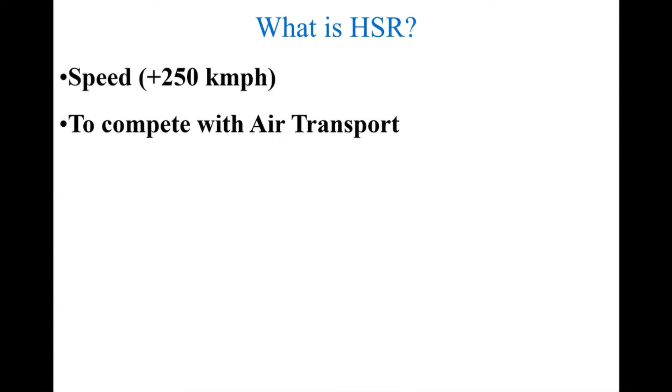The result of this construction for the high-speed track, we will only know once it is constructed and trains start plying on it; only then will we see the fruits. But as of today, the work on the Ahmedabad Mumbai section has already started. What I got from the concerned person is that contracts for almost 50% of the work have already been awarded. The rest are in the pipeline, and work is in different phases of construction.

Let us see some features of the Ahmedabad Mumbai speed corridor. Total length is 534 kilometers. This is a combination of elevated, on-formation, and tunnel sections. Elevated means construction of viaducts. The design of the entire track is by the Japanese agency JICA. It will mostly be concrete roadbed and slab track, whether elevated or on formation. The target speed is 350 kmph, and the cost is about 1 lakh crore, which may vary slightly depending on the time.

Train frequency in peak hours is every 20 minutes, which is what they can accommodate in their system as the maximum capacity targeted. But in the beginning, probably this will not be the frequency. As stated by the MD of the High Speed Corridor, they are planning to run every 30 minutes in peak hours, and in non-peak hours it may run every 1 hour or maybe every 2 hours. That is the planning.

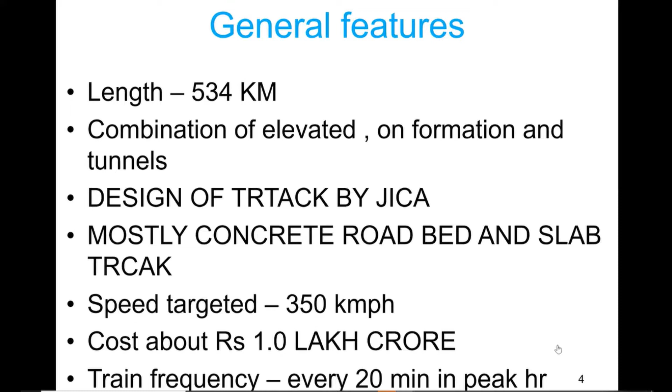Now, the requirements of high-speed rail in regard to track: it is track structure and geometry, then formation wherever we are constructing on formation, rolling stock, advanced electrification and signaling system, advanced operating system, and of course we need to introduce an advanced maintenance system also. So let us see one by one.

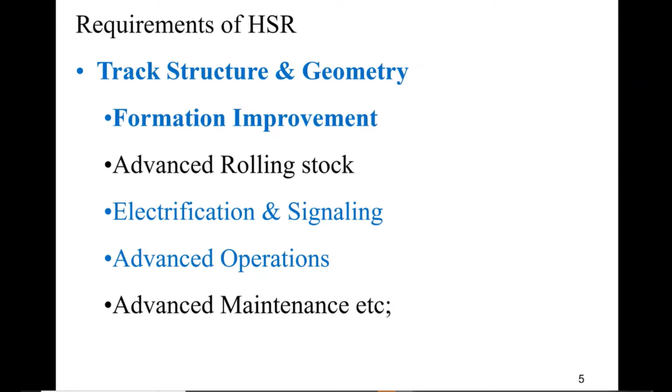Track structure and geometry: in the entire construction, the sharpest degree of curvature is only 0.5 degree. Sharpest means anywhere in the entire section it is 0.5 degree; otherwise it is mostly straight or less than 0.5.

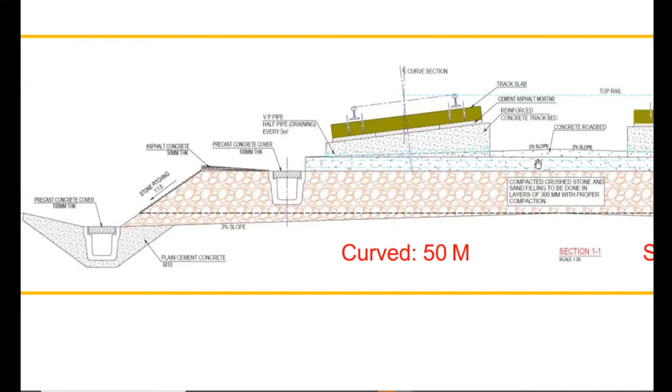This is the section of slab and track. Let me give you two minutes to see this item here, let me make it slightly bigger. See this first section, this is for curved track. This is a side drain here, followed by formation and another drain on this side. First it says the compacted bed here, and over the compacted bed you have a concrete roadbed. So one by one, if you see all components from bottom to top, the structure for the entire construction, you will be able to appreciate how sturdy and strong they are making it.

So first let us see, this is rail. Below rail you have track slab, this precast track slab, the green one. Below this track slab you have cement asphalt mortar to provide a cushion and also facilitate some corrections to cross levels. Below this cement asphalt mortar you have reinforced concrete bed. The requirement of super elevation for this high speed track is taken care of in this RCC road bed. Whatever super elevation was required as per the degree of curvature of your mainline curve, that super elevation is provided here in RCC road bed.

Now below this RCC road bed we have lean concrete bed. This layer, where my cursor is moving, this is your lean concrete bed. So RCC bed, then below is lean concrete bed. Here also some reinforcement is provided to take care of thermal expansions, and below this ordinary concrete bed you have compacted crushed stone and sand filling done in layers. That is the formation normally we provide in our railway track.

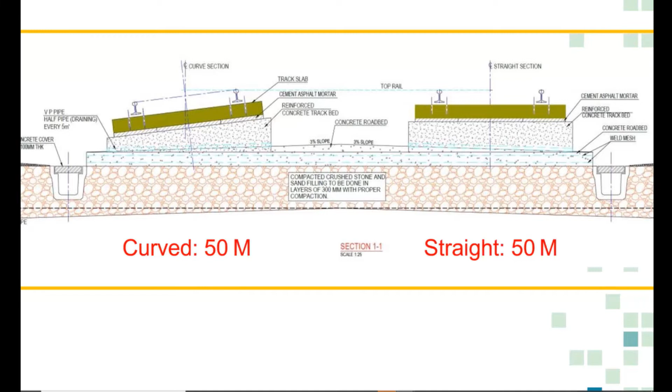For curved track, the super elevation is provided in the upper RCC concrete road bed. If it is straight plain track, no super elevation, the structure will look like on the right side. So this is the shape or structure for high speed track, whether curved or straight. This sample or model has already been created at Baroda near our Nair Institute, because the high speed office is located near Nair Institute. They have created this sample model track structure both for curve and for straight. If somebody happens to visit Nair, please see this track structure already available there.

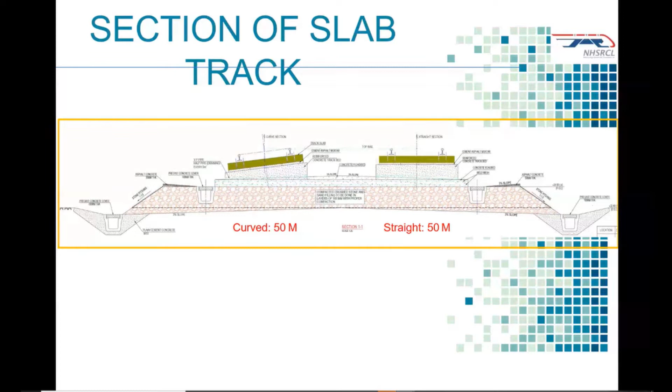So this is the general arrangement of different components of the track. Now this is a simple view of precast slab, where my cursor is running. You can see these are the precast slabs and rails fixed on the precast slab. All the construction on formation has been done, and here you can see this arrangement. This is the RCC concrete road bed, not the lower one. Over it you have cement asphalt mortar, and then precast concrete slab. Over it you have rail and fastenings.

This round shaped structure, which is called a bollard, is part of this RCC concrete road bed. This round shaped structure acts in two ways: one, to provide a clear separation gap between one precast slab and the other; secondly, it also resists the lateral or longitudinal disturbances of the precast bed slab.

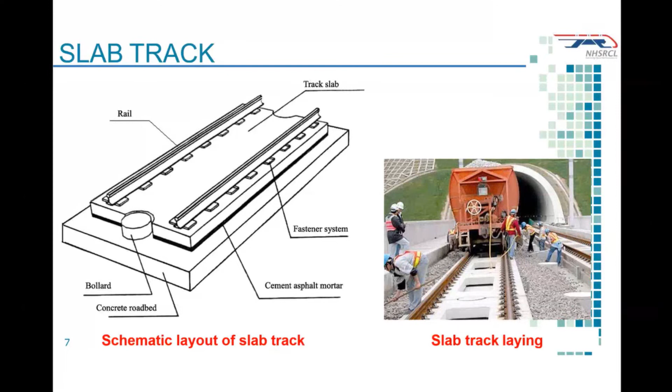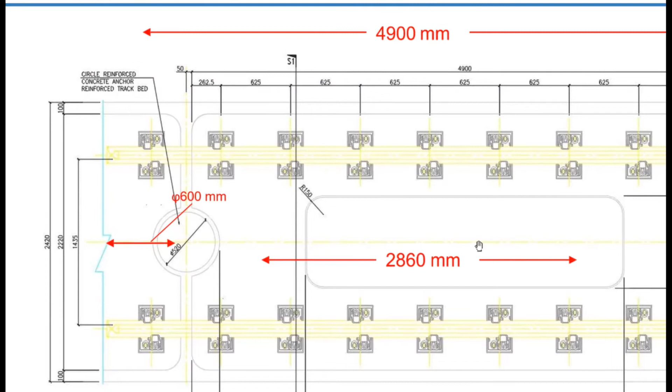So this is the top plan of your slab track, and now let us see the step-by-step construction of how they created a model track structure in Baroda. The same photos I have got from them. If you move from here, this is before site clearance, the first figure. Then the second figure shows site clearance in progress.

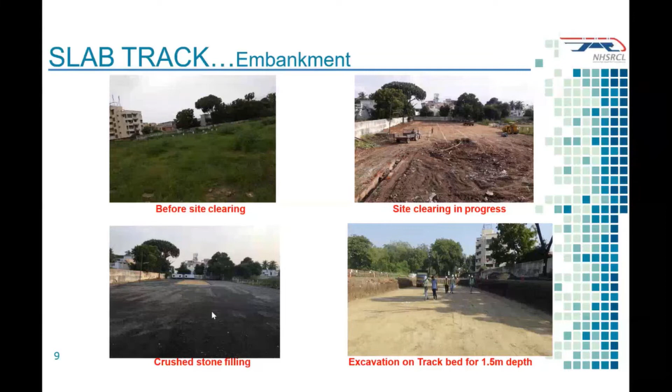Then crushed stone filling, that means creating a formation. So here in third, excavation is going on, and after excavation, preparation of formation. You can see this is backfilling, creating a formation. Now we have reached up to the top of formation.

As in our construction, we check by CBR value regarding the construction quality and its capability. We check by CBR value. In Japan, or by JICA, they check by the so-called K30 value. This K30 value is similar to our CBR value. So they ensure with this K30 value that the formation top is properly compacted and properly constructed.

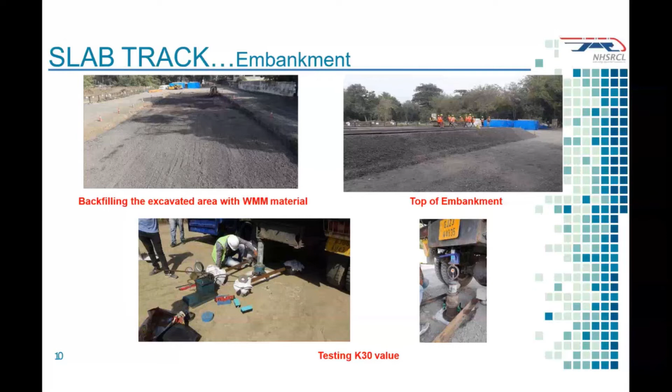So this is how the top of formation is created. Now after top of formation, this is the bottom wala concrete. You can see the reinforcement. This is called wire mesh placing on top of reinforcement, on top of embankment, and then the bottom wala concrete bed. Reinforcement is provided in this concrete bed, and this is not lean concrete. In fact, as compared to the top wala, this is proper concrete, 1:2:4 wala. So proper concrete road bed is in progress with reinforcement. This is that bottom wala concrete bed.

You can see the slope has been provided here on both sides in the bottom wala concrete bed, as we saw in the initial cross section, and this is final finishing. So finally the bottom wala concrete road bed is constructed, and this is without any cant, because cant has to be given on the top wala concrete bed.

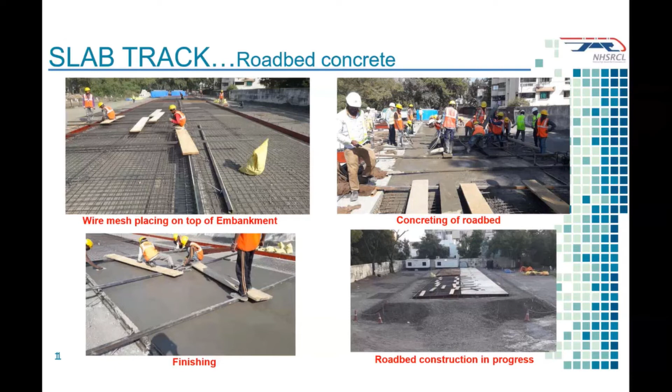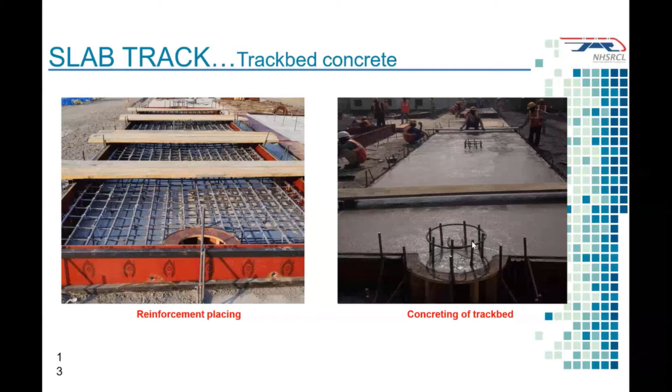So this is the top concrete bed. And finally you can see the bottom wala here. This is bottom wala, and over it you have this top wala. Now here, because they were creating a model type of track structure, on one side this is a plane without any super elevation, and on the other side they have created it with super elevation, whatever was required as per design. So this is finally the constructed road bed.

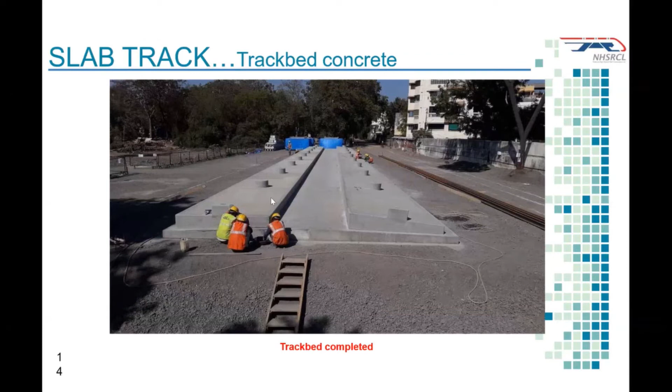Still, precast slabs have not come over it. So you have formation, then one layer of concrete bed, that is also RCC, of course lean RCC, and then you have the proper RCC road bed. Now over it will come your precast slab, and these are the precast slabs. These precast slabs will be constructed in a different place, in a controlled manner, where you have all facilities of controlling the quality, and then they will be transported to the site and placed on top of the top concrete bed.

Of course, in between there will be a layer of cement asphalt mortar. So this is the construction from bottom to top.

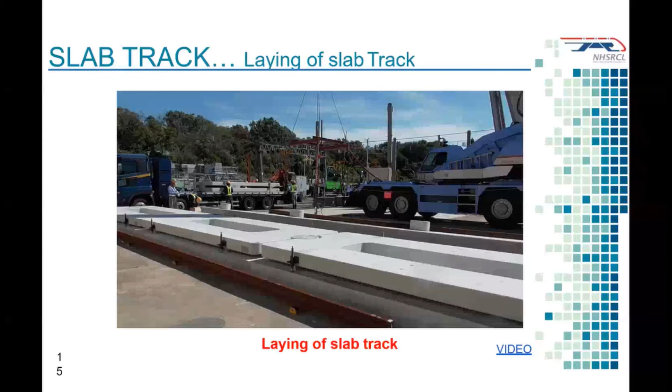Now here they are showing how the cement asphalt mortar is placed between the top precast slab and the top of the concrete bed. For this they have a machine which, with the help of hydraulic pressure, fills up the bags, and these bags are laid between the slab and the top of concrete bed. Whatever little corrections are required, those corrections and levels can be done with the help of this cement asphalt mortar.

So this is how it is done. And finally, when the slab is placed, you see this layer of CA mortar filled in proper bags. This provides cushion and also helps in slight modifications in level.

Why slight? Because there is a chance of too much deterioration if you rely on it too much, since you are taking all precautions. Whatever you construct should be perfect. So the construction quality has to be so good that right from the beginning you have all parameters in a perfect condition. So this is how they go about it.

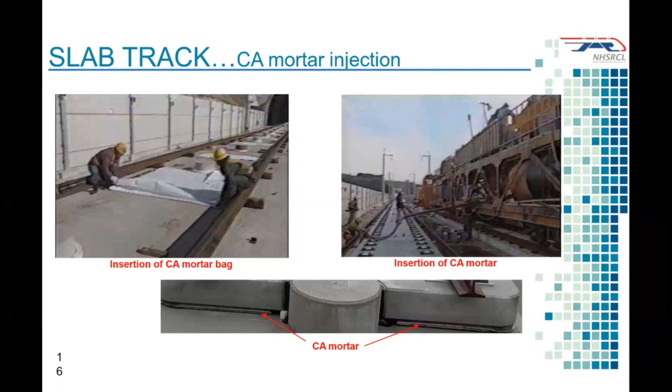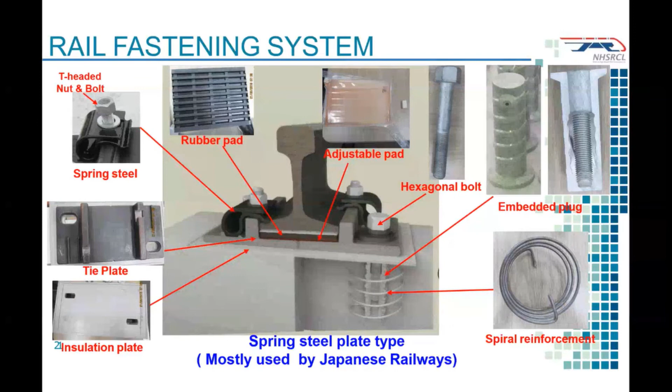And thereafter, it is brought for taking out. In the meantime, you check the strength of concrete also, whether it is meeting the requirement or not. So this is a 1 day cycle.

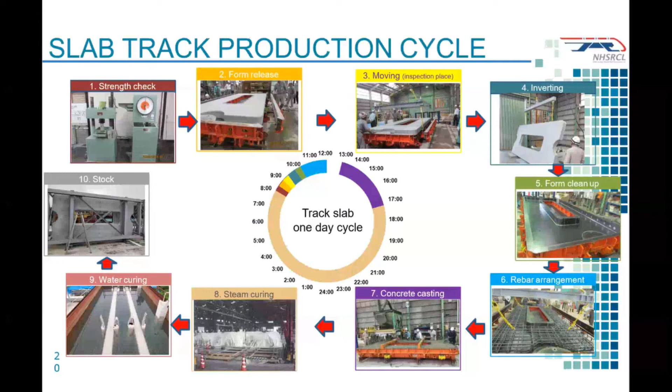Most of the activities are mechanized, like opening and closing of this formwork. This opens in a hydraulic manner - this is our formwork or mold, and this is how it opens. You can see opening and placing of reinforcement and inserts, etc., for fitting the rails.

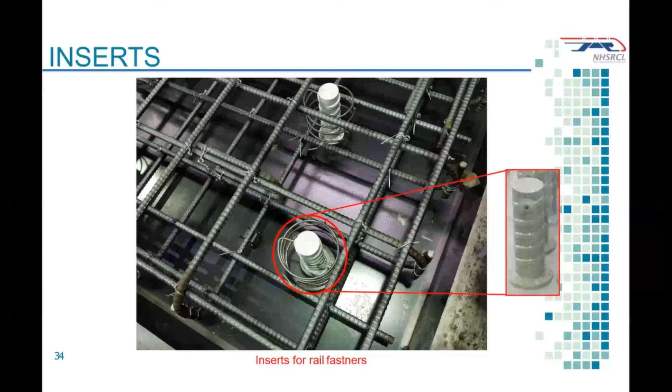That is the reinforcement cage ready to be lifted and put up. This reinforcement cage is prepared outside, not within that formwork. It is prepared to the exact dimension, then lifted and placed on top of the mold.

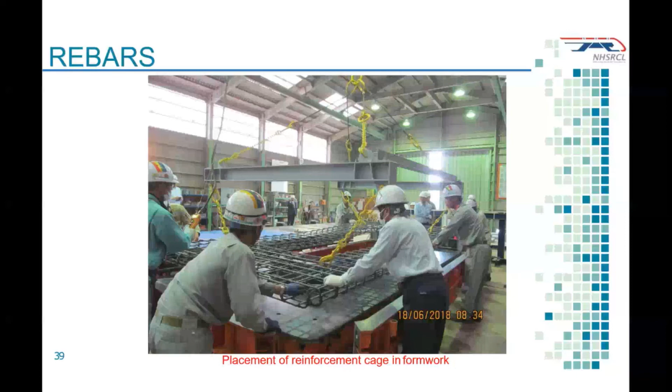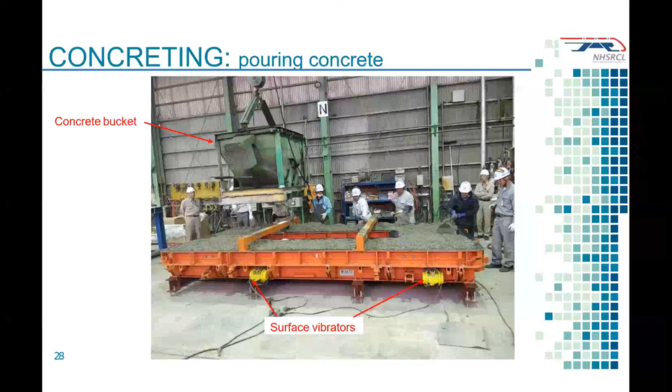Then the mold is refixed. Checking of reinforcement, etc. is done - this is that checking. Before pouring concrete, proper checking is done, and then concrete is poured. With the use of surface vibrators, compaction is ensured, and finally the top surface is finished.

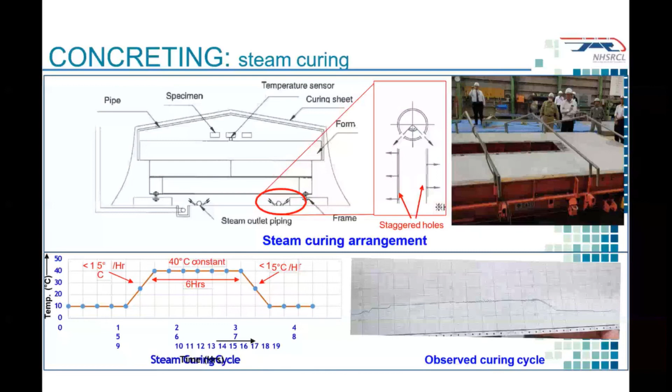After that, it is taken for steam curing. In steam curing, it is a controlled kind of curing - slowly the temperature is raised and then again brought down. The total time it takes is about 10 hours or so. Thereafter, it is taken to water curing, where it is kept for about 7 to 8 days, maybe slightly more. And thereafter it is taken out for placement.

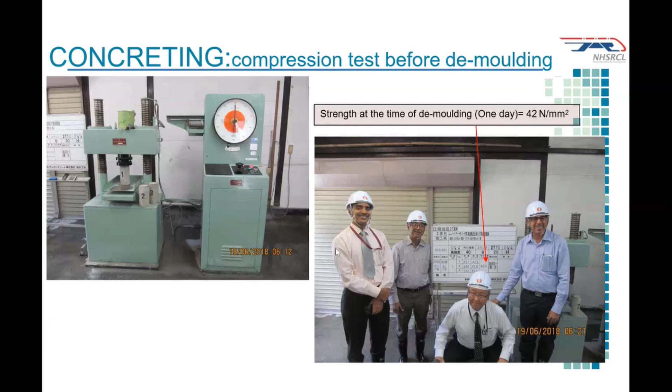This is that team. This gentleman is Mr. Anupam Awasthi, who is now posted in this high-speed corridor. He had gone to Japan for a 2 year course sent by railway, and after coming back from there, he has now been posted in the high-speed corridor. So taking out this slab, and finally checking, inspection, and...

...then it is ready for use after water curing.

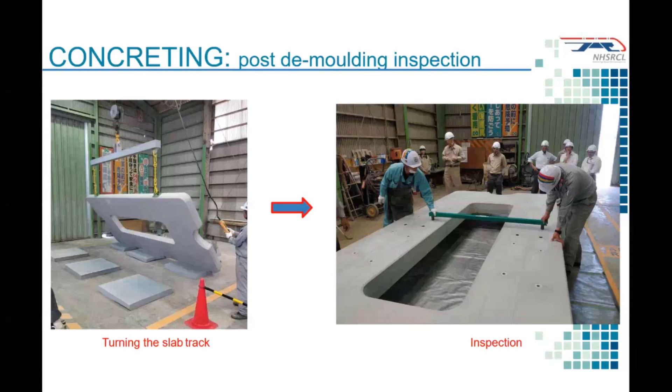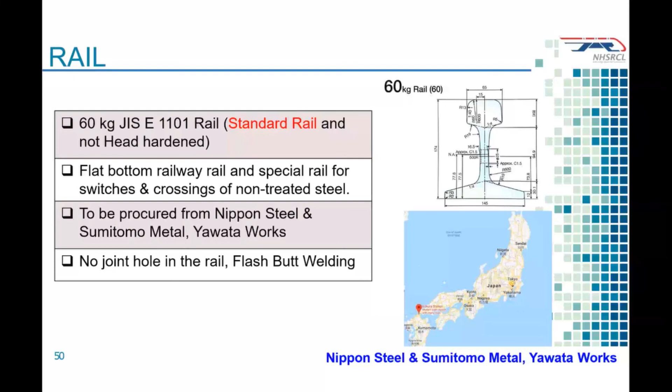As regards to rail, the same 60 kg rail will be used, but these rails will be from Japan, not from India. All these rails will be transported from Japan and used in this Ahmedabad-Mumbai corridor. They are being procured from Nippon Steel and Sumitomo Metal. Of course, there was a debate why not use our own Indian rails, but ultimately for this project it has been agreed that they will be from Japan only. The entire technology is from Japan.

There will be 2 maintenance sets, one at Mehsana and one at Virar. As regards to funding, 80% is by the Japan government, and the remaining 20% is to be shared - 10% by the states of Gujarat and Maharashtra, and 10% by railways. So the 80% component is coming from Japan, and the remaining 20% is shared 50-50% by the central and state governments - Gujarat government approximately 5%, Maharashtra government 5%, and remaining 10% by the center. And we will pay royalty to Japan corresponding to this 80%.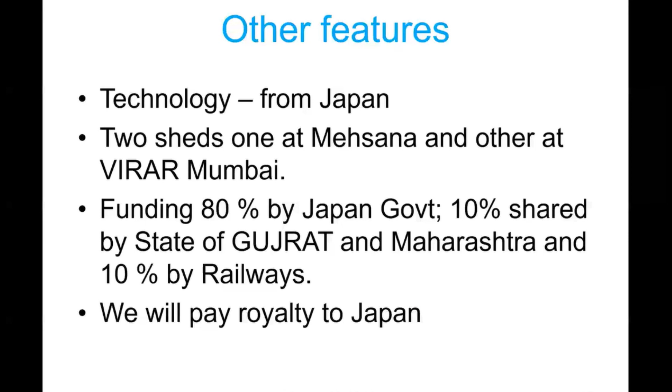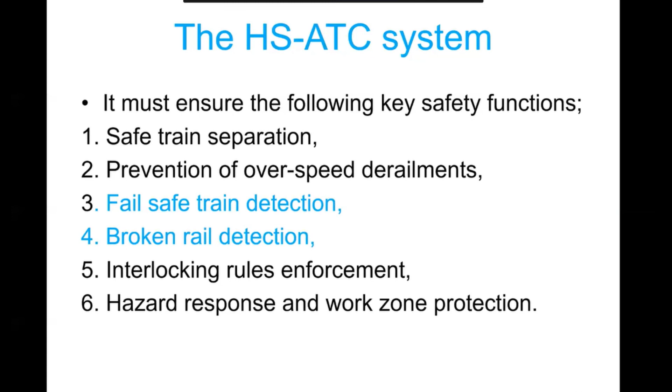There is proper interlocking rule and hazard response and work zone protection. If somebody is working on the track and a train is approaching, the system will be able to detect that also. Now it will work on three systems: ATP, ATO and ATS. ATP is automatic train protection, then automatic train operation, and automatic train supervision. Let us see one by one.

Automatic train protection, as we discussed, takes care of any obstruction, rail fracture, and anybody working on the track impinging on the track's circuiting system. The same message will then be communicated to the controller and to the signal system.

Automatic train operation means there will not be any controller to guide the movement of the train directly. Of course, controllers will be there, but the operation will be governed by a computerized system, and the train will move as per this automatic train operation system.

Similarly, automatic train supervision means wherever you have the requisite stops, the train will come to a stop even if the driver forgets to apply the brake. So the train stopping information, etc., will be fed into the computer of the train, and it will come to a stop after covering that much distance.